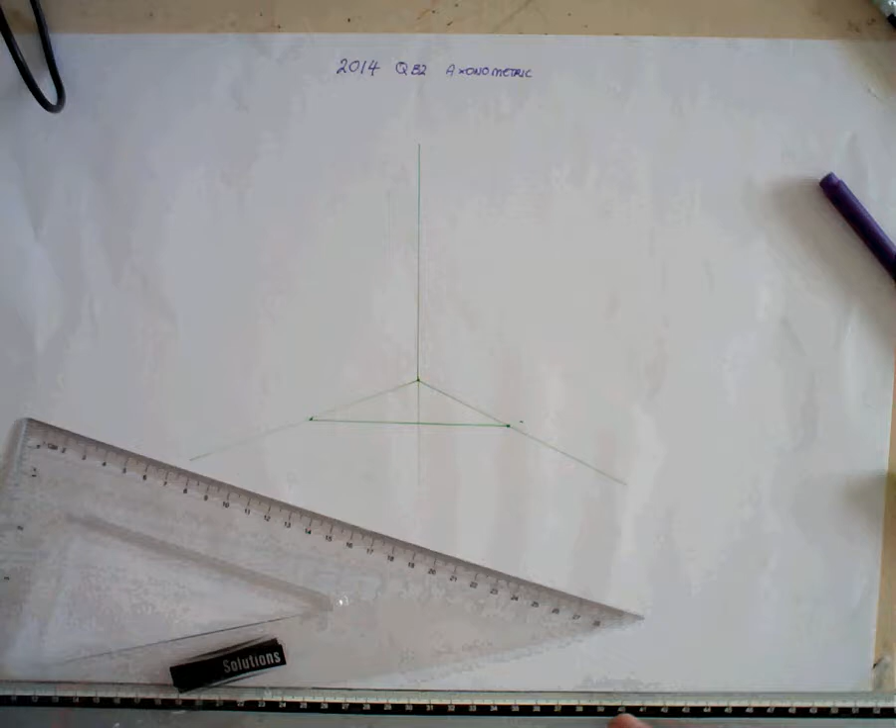Now, using your sliding set squares, put one like so, flip the set square, slide it up to the top, finds one side of the triangle, join this down to here, finds the other side of the triangle. So that's your axonometric plane. Next thing to do is set up the two elevations. So we're finished with this work for a while now.

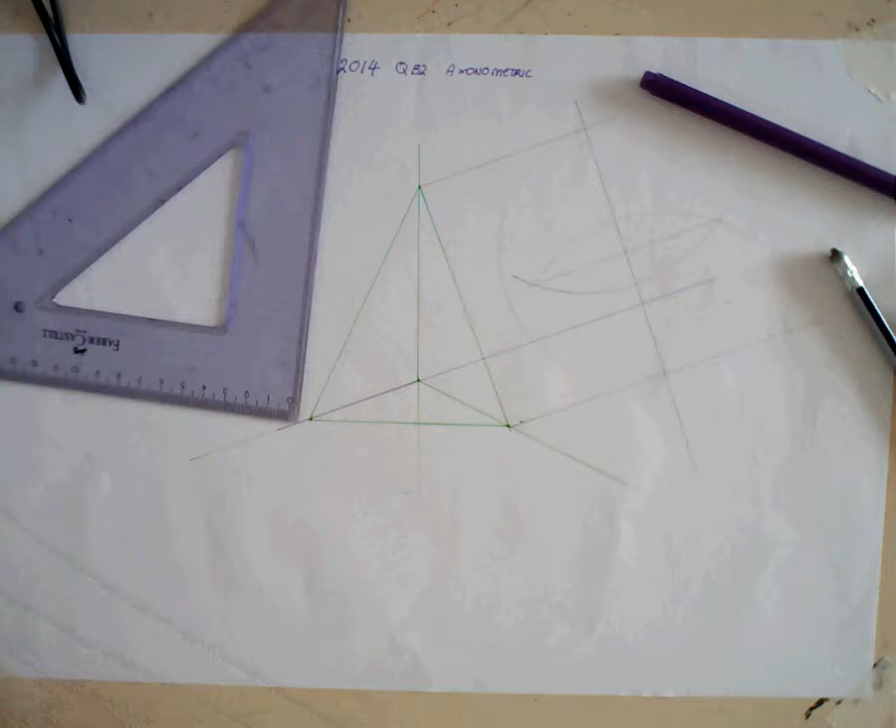So I'll set up the elevation to the right hand side. So using this as my angle, this line here, I'm going to bring out this point of the triangle or the plane and the top point also. Flip it. I need to bisect that line in half to find the position for my semicircle. There's a semicircle like this, and now I can draw a line like so, and a vertical line also.

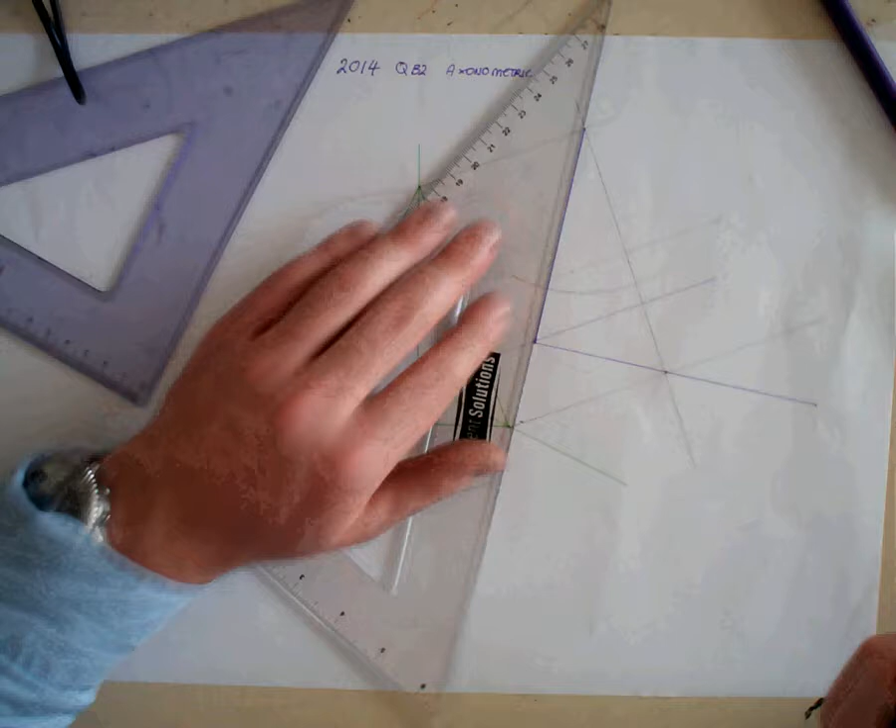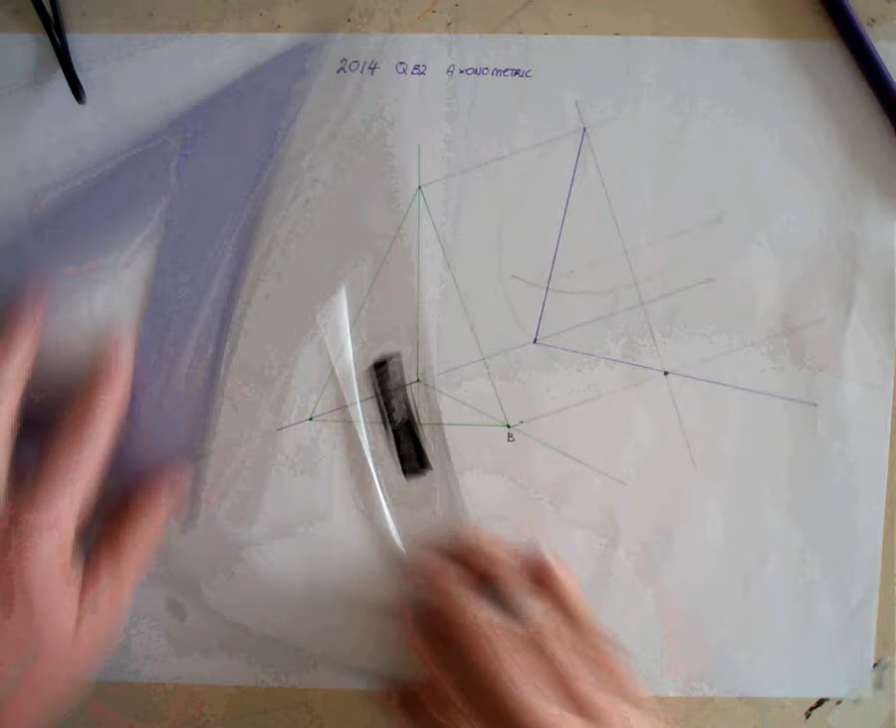Now I'm ready to set up the basketball net in this view. So we're not told the value for h, that's okay, and we have to work out what width it is. So from what I can see in the question, point B is bang in the middle. So here's point B. And as B comes out, that is the middle position now for the basketball net. So I take that line up here. Okay. Just like so.

Now, you're told now that it's a height of 10 and then a height of 40. So I'm going to measure up 10 mil height, and I'm going to measure up a 40 mil height. And we have to fit a square, that's where the backboard is on the net, so I'm going to fit a square which has an edge length of 40. So I can go 20 to the left and 20 to the right. Same up here, 20 to the left, 20 to the right. And there's the square found. This is also 20 to the left, 20 to the right across the bottom. That's the bottom of the board.

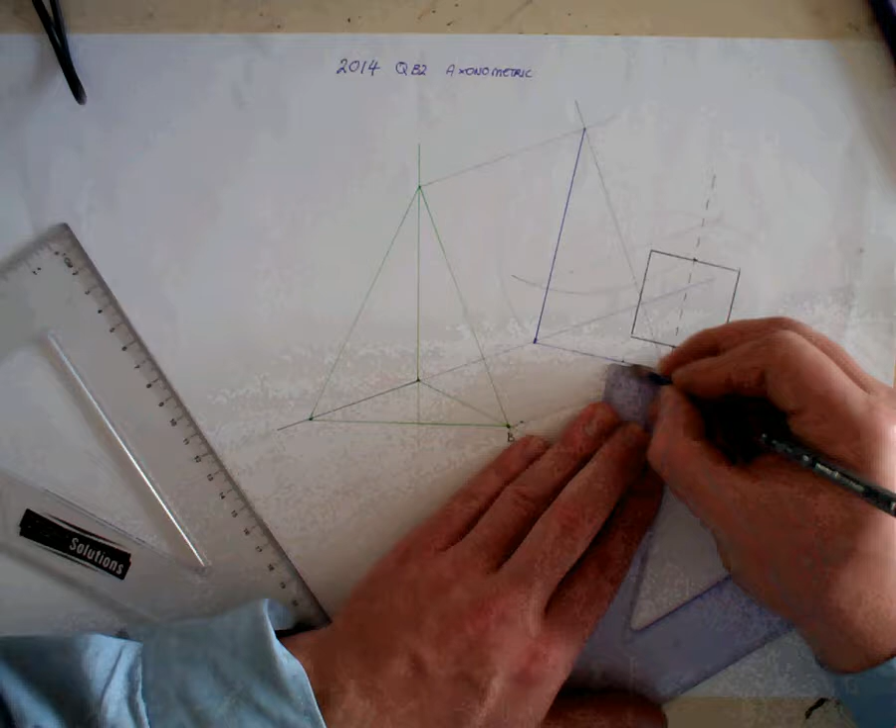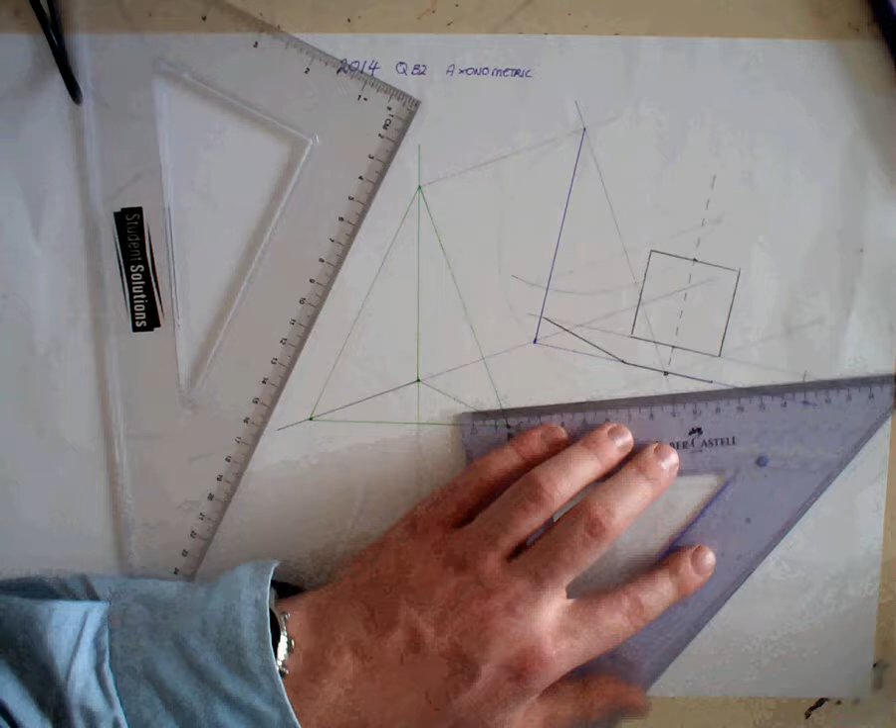And then the angle is found by measuring up 10 mil. Go out this side, like so. And now it's equidistant out the other side because the thing is symmetrical. So I can take this distance from here to here. I can swing it out the other side. Okay.

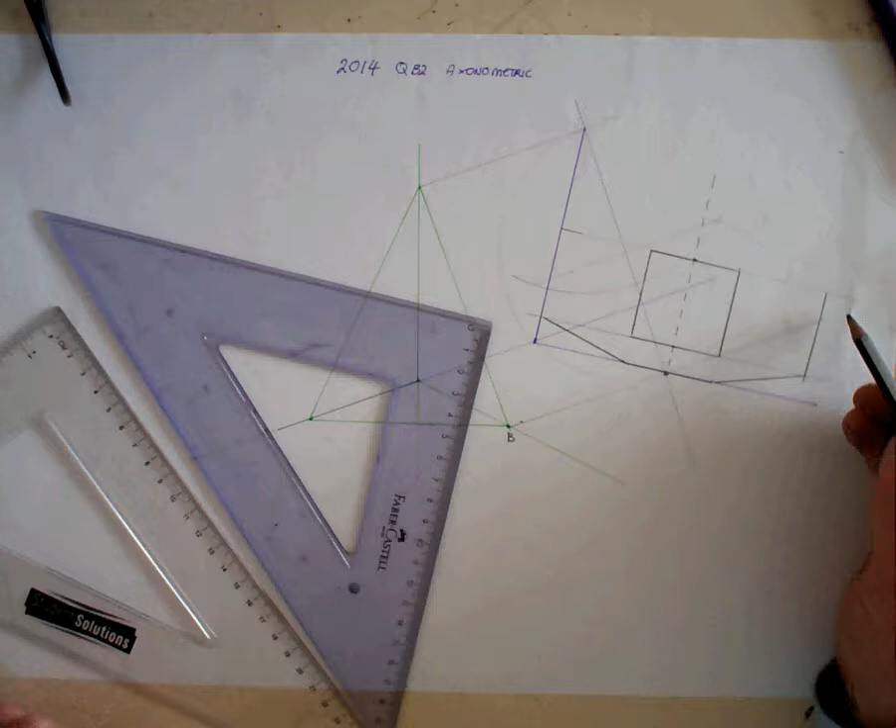Now, you're then told to measure up 40 mil, which I've already done. Just like so. So there's a line coming across here. And that line goes straight up like this. I have to fit an arc in around here. Okay? To fit some sort of circle around here. And the center is swung from here. So I just put my point of my compass here, put the pencil there, and I can draw the arc right around to the top of this.

Okay, that's the net set up there, and now I need to set up the other elevation, the other side. So I go this way, this view, drop these points, flip my set squares. Again, the position of that line doesn't matter, where you keep this line doesn't matter. Use my compass, bisect this in half to draw my semicircle, so it's the very same as the other side. Find the center line, draw my semicircle.

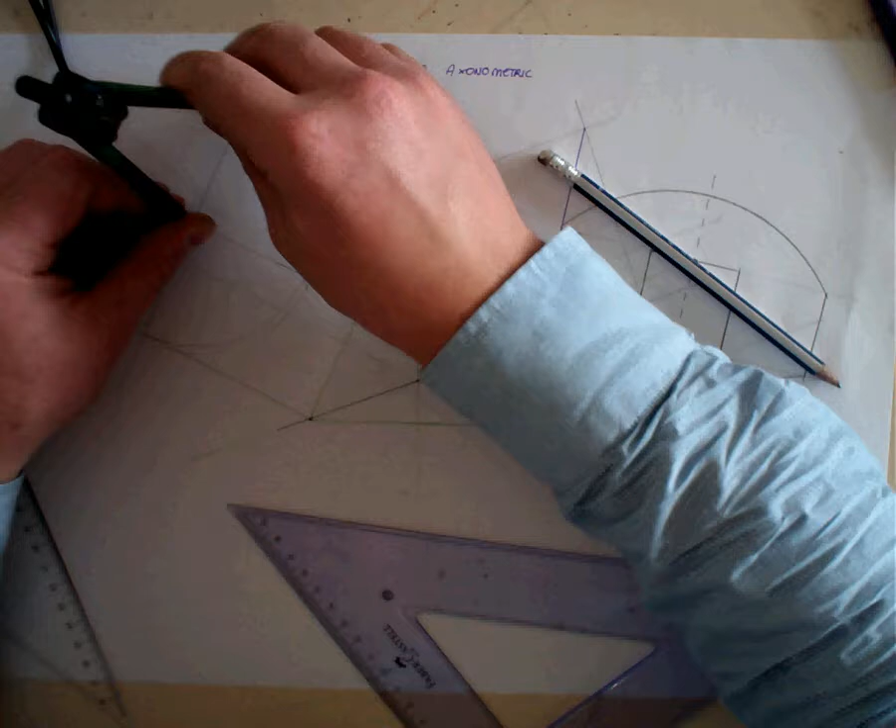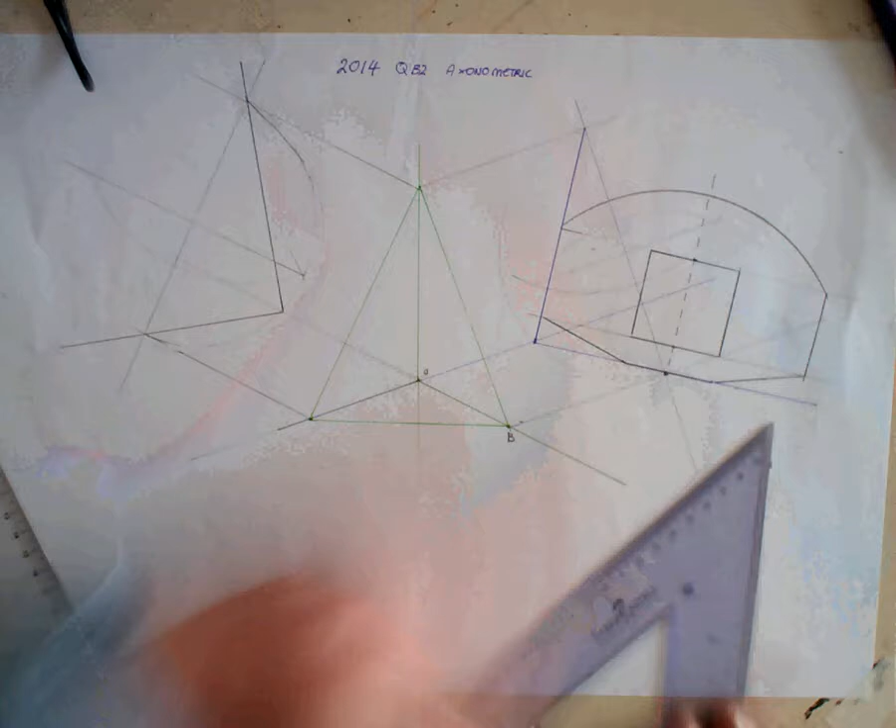Now, semicircle found, bring out O like what I did this side, bring out O out here, and that finds my 90-degree angle. Now out here I just have to measure up 10, 40, and this value H. So 10, 40, and then this is the height for H. From here to the top of that circle is the value for H. That's the height I apply here.

Okay, now we're ready to start finding the 3D. So I would make a 3D sketch of the net first. There's no depth or thickness, which is good news, so it'll be very fast to find.

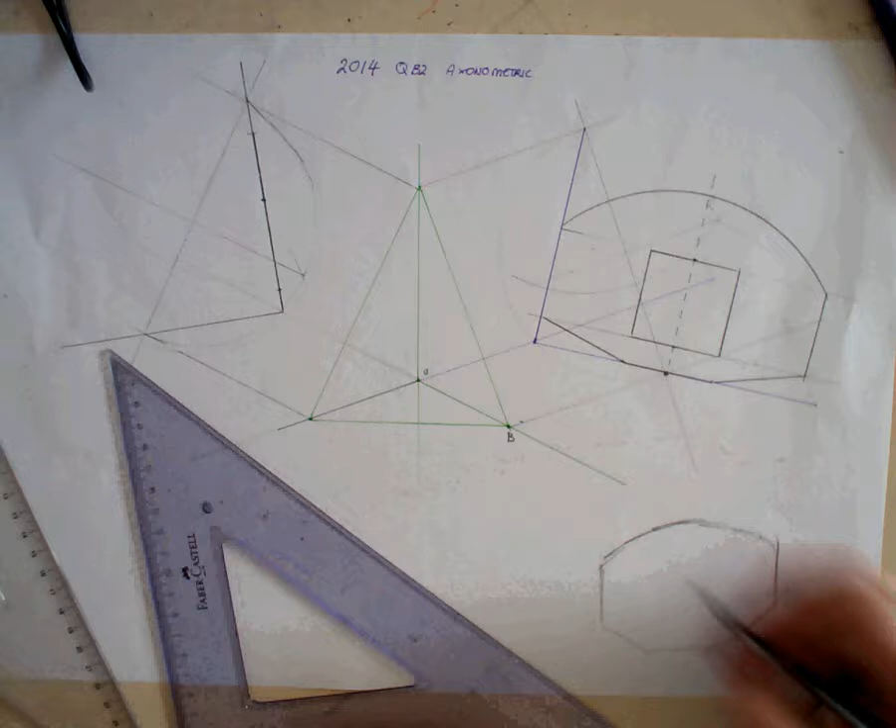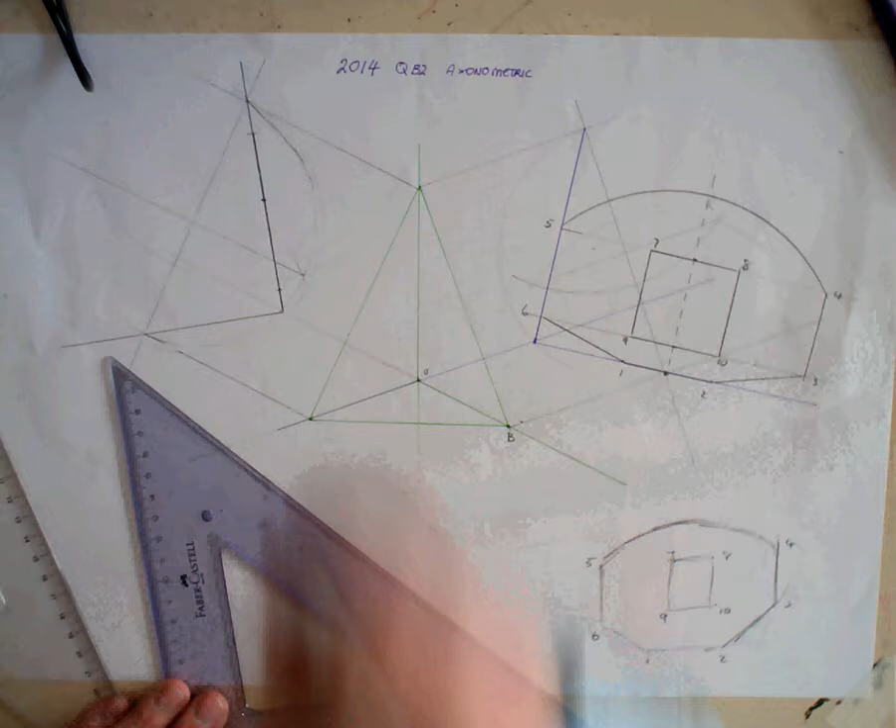Now, I'm going to label it 1, 2, 3, 4, 5, 6, 7, 8, 9 and 10. Label the same: 1, 2, 3, 6, 4, 5, 7, 8, 9, 10. Apply these dimensions over here. This will be 1 and 2. This dot here will be 6, 9, 10 and 3. This dot here will be 5, 7, 8, 4. And this dot here is the highest point. I'm going to call the highest point O. Okay, so we'll find them.

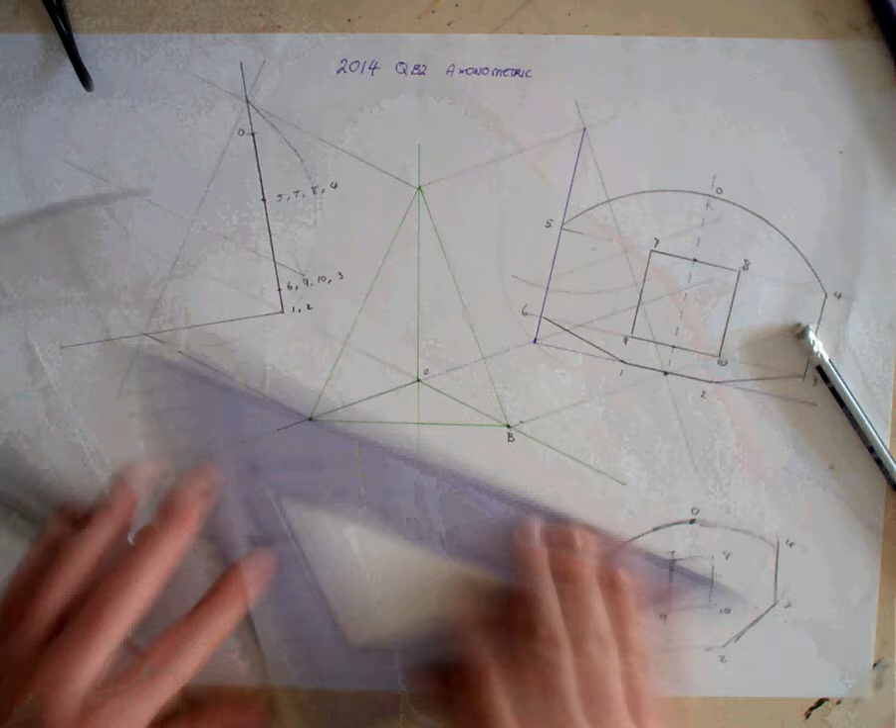I'm going to speed through this now. To find these is the very same way as we'll always find them. If I want to find 1 and 2, bring 1 and 2 back at this angle. Bring 1 and 2 from this angle on this side. So there is 2, and there is 1. That's 1 and 2 found. That's a heavy line.

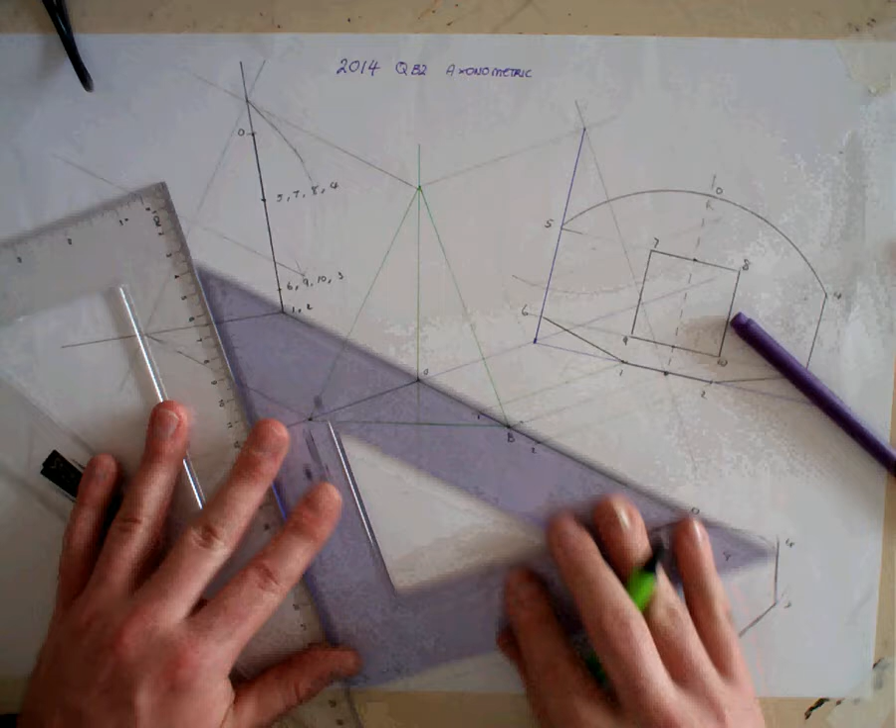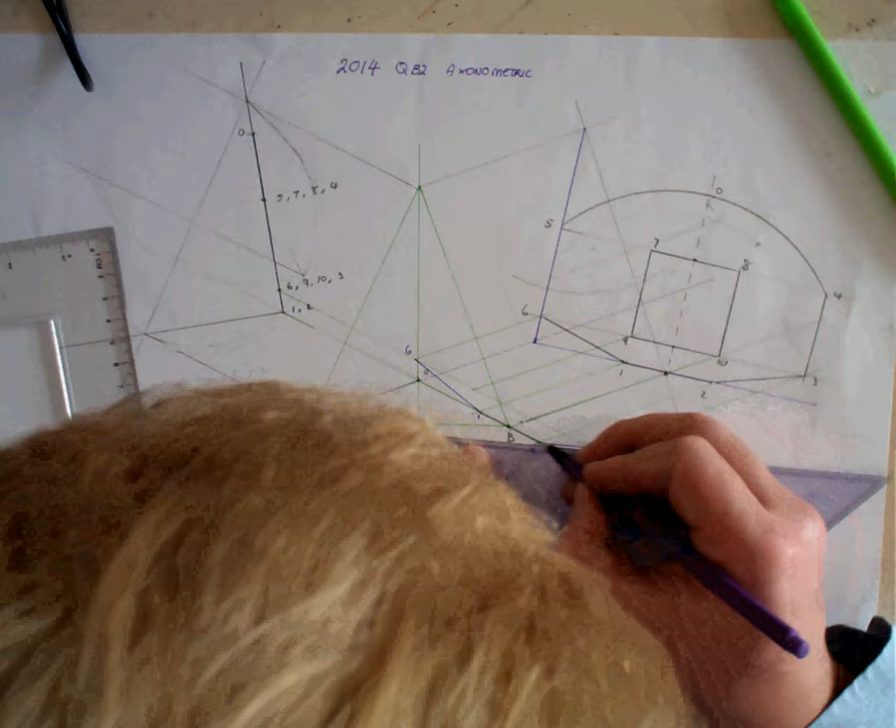Okay, 6 next. So bring down these dots, which will help us find a lot of the backboard in one go. We can bring down 3. We can bring down 10, because that's on it. We can bring down 9, because that's on it. And we can bring down 6, because that's on it. Chain them up. 6. This one goes to 3. And then we have the bottom of the square. There is 9 and 10.

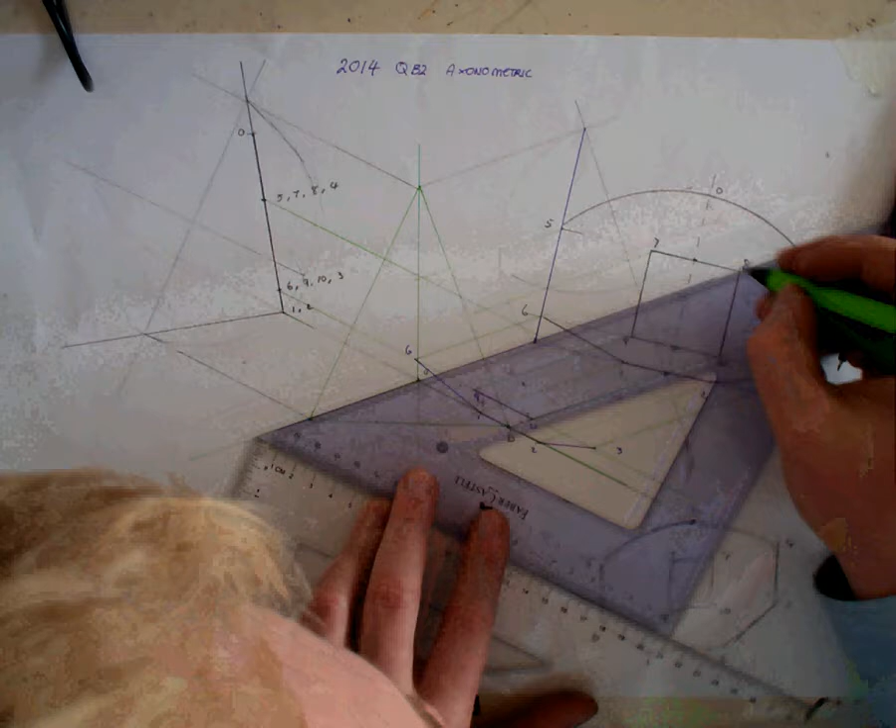Bring down all the other dots then for 5, 7, 8 and 4. So bring them down at the same angle again. There is 5, 7, 8, 4. Join those up. Okay, and that finds a square in the middle of the board also.

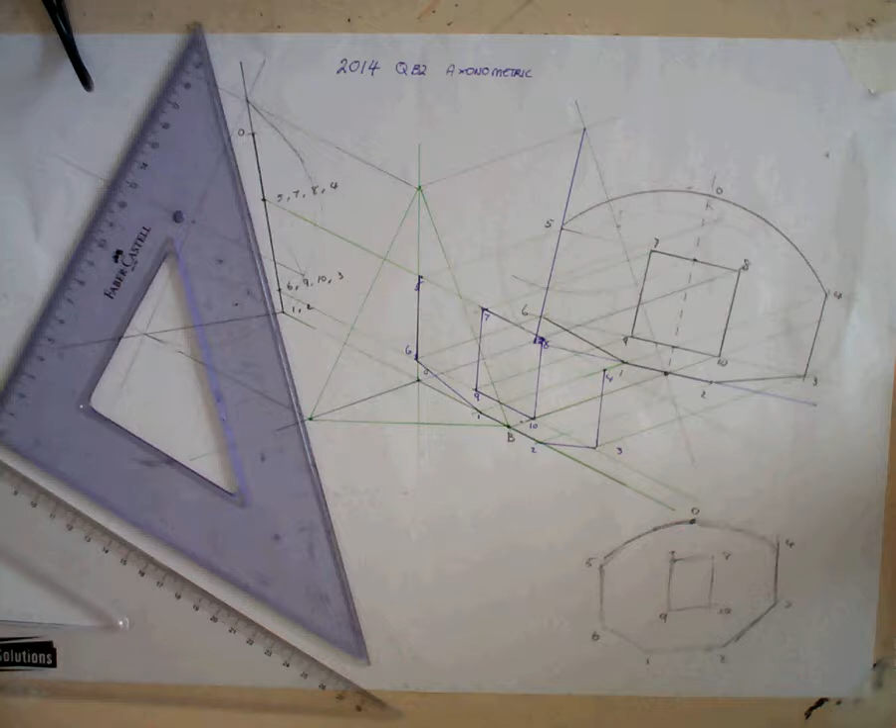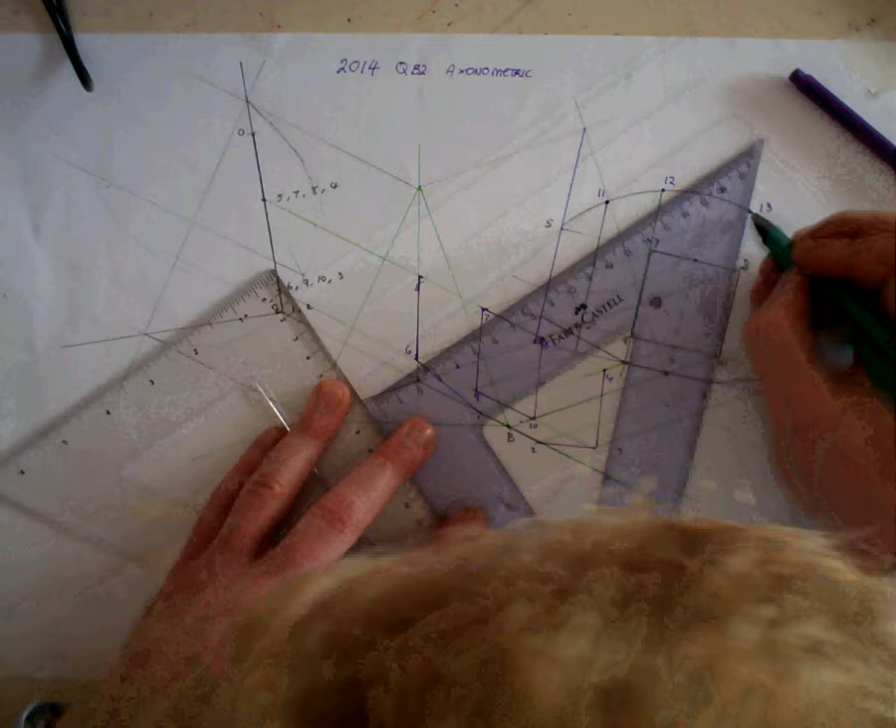Now to get the curve across the top, pick a few random points. So we'll call this 11, 12. We already have O, 13, 14. Get their heights. So there's the height of 11. There is the height of 12. That is the height of 13. That is the height of 14. Take those heights, apply them over here.

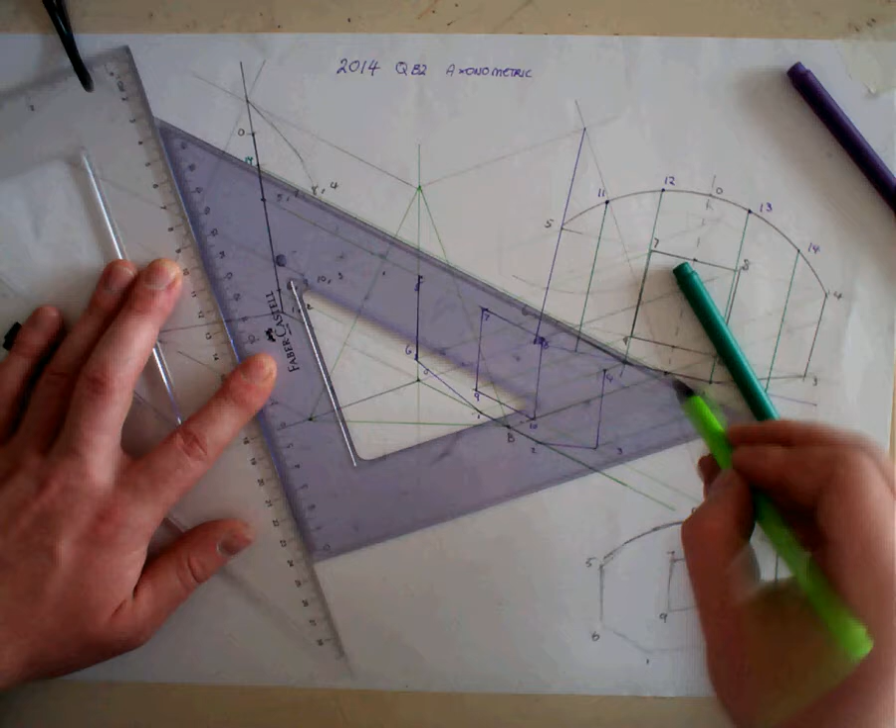So if I want to find 14, I take the height of 14. I apply that height over here. That has found 14 on this side. I bring 14 now down at this angle, just like we brought the rest of them. And then bring 14 out to meet it. That there is point 14 on the curve.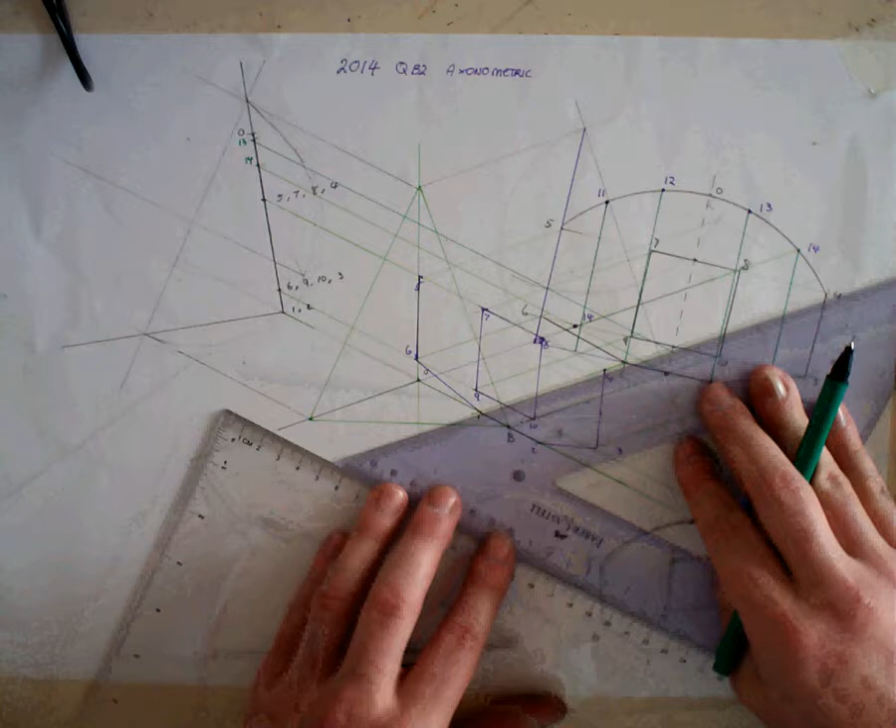Do the same with 13. Get the height of 13. Apply that height over here. There is 13. Bring down 13 at this angle. Bring 13 out to meet it. There's point 13. 12 is the same height in my case. 11 was the same height as 14.

And I can also find O, or the highest point, so I'll bring it out as well for accuracy. Bring out O. Bring down O. Where they intersect is point O. Join the dots up freehand to get the top of your backboard.

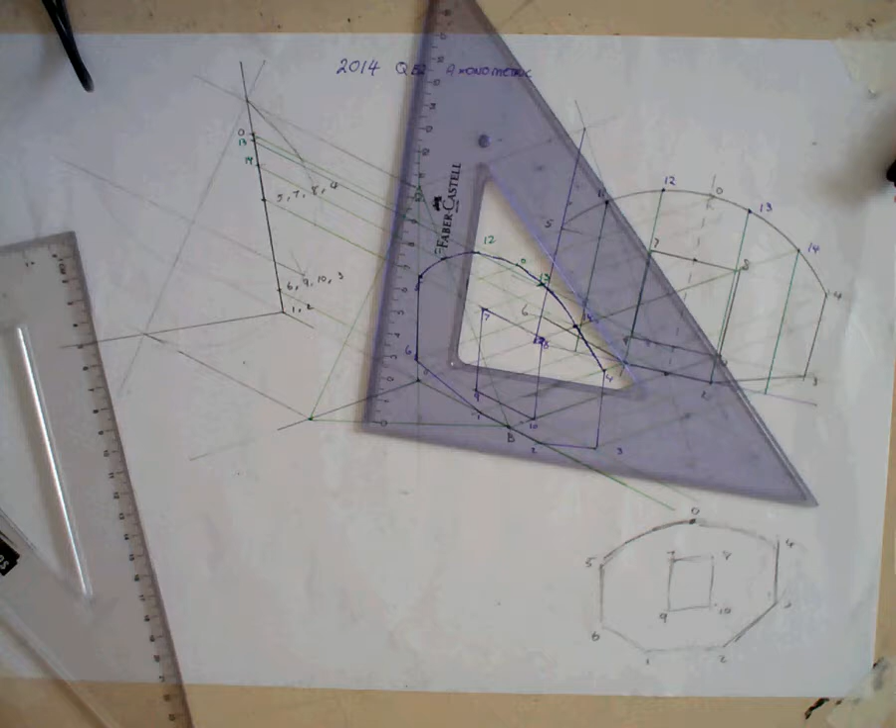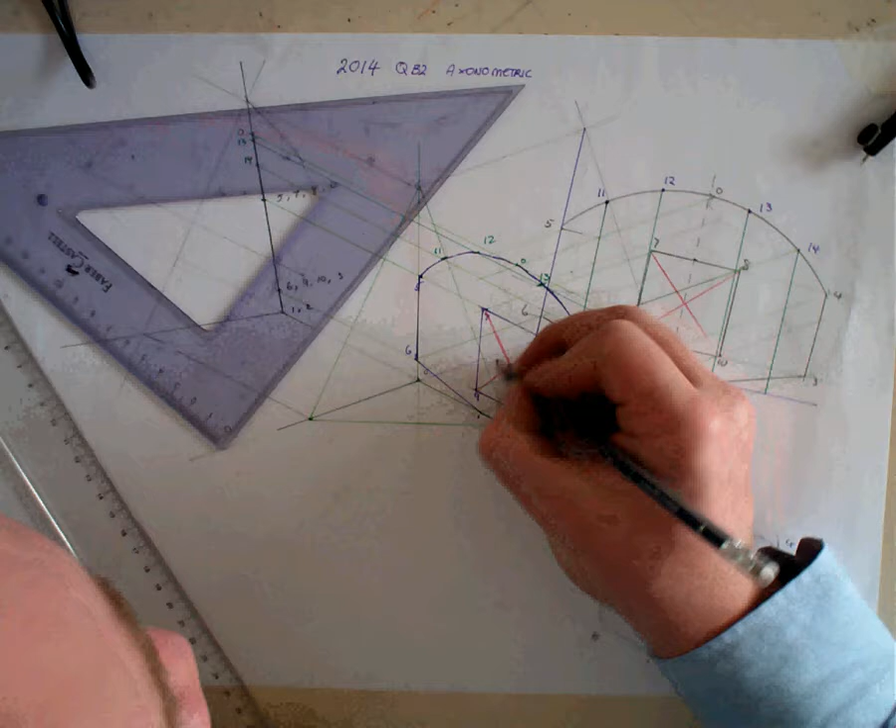Now, part C of this question has to do with a basketball. You're told that a basketball is located at point P. Point P is located in the center of the square. Let me get a different color. To find the middle of the backboard here, just join the corners. So if I join them together, 8 down to 9, 7 down to 10, that finds the position of point P, which is here on this drawing.

And you're told in the question to draw the axonometric projection of a basketball which is in contact with the board at point P, and the radius of the ball is 12. So if I set my compass to 12 mil and I draw a radius 12 circle here at point P, that is the basketball.

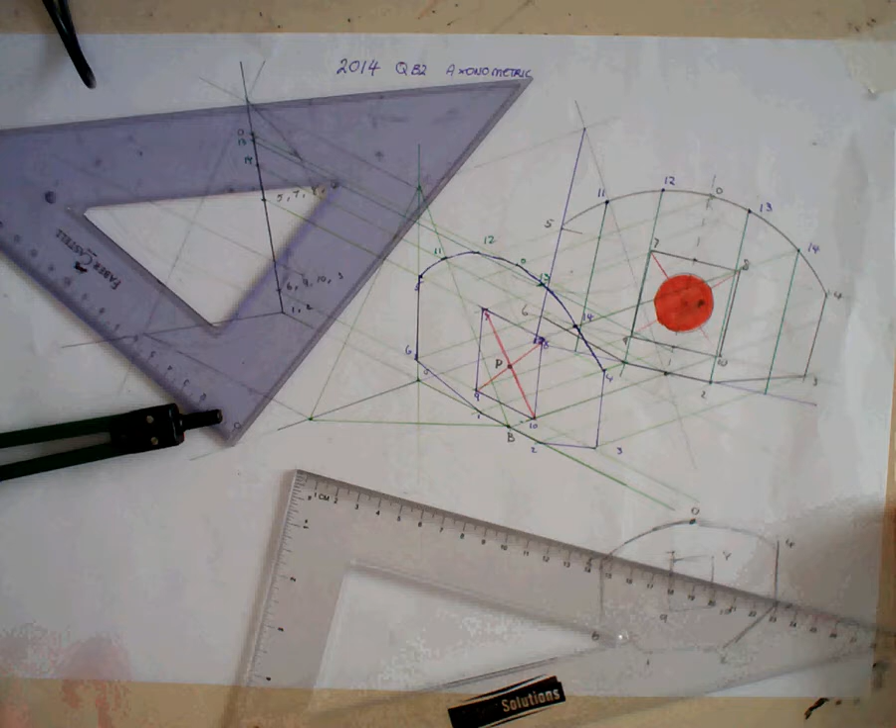Now, a lot of the time students get confused with spheres when trying to find them in axonometric. Just think about it. If you're at the soccer pitch or a GAA match, no matter what way you look at a sphere or a football, they always appear as circles. So all I have to do is take that radius 12 and draw it here around point P. That's it.

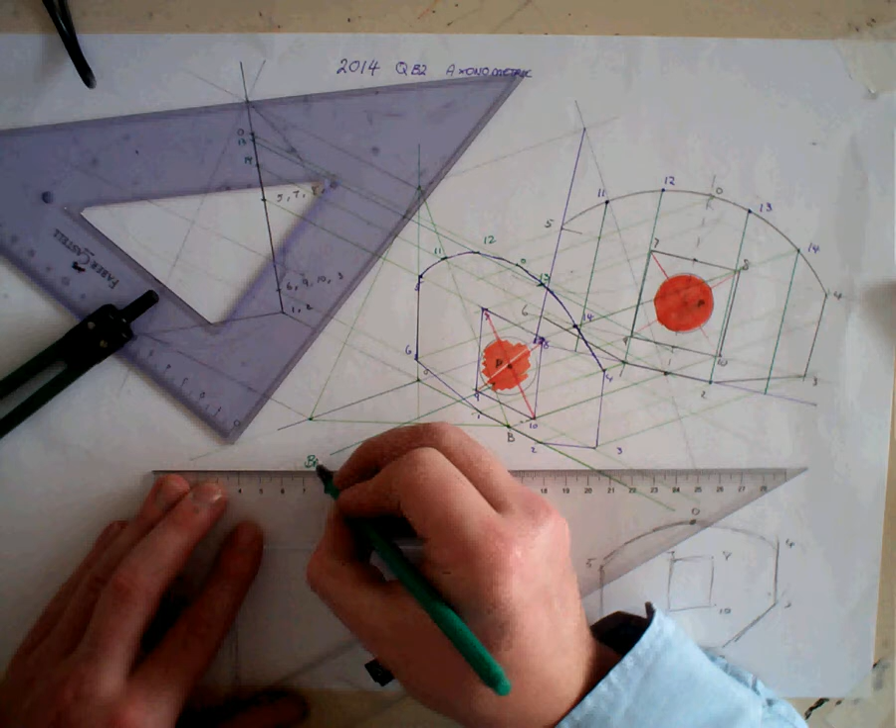They're just trying to trick you with a very simple question, trying to catch you out. So, that's the answer. Draw a little note on it: basketball. And that's it. Okay, full marks.